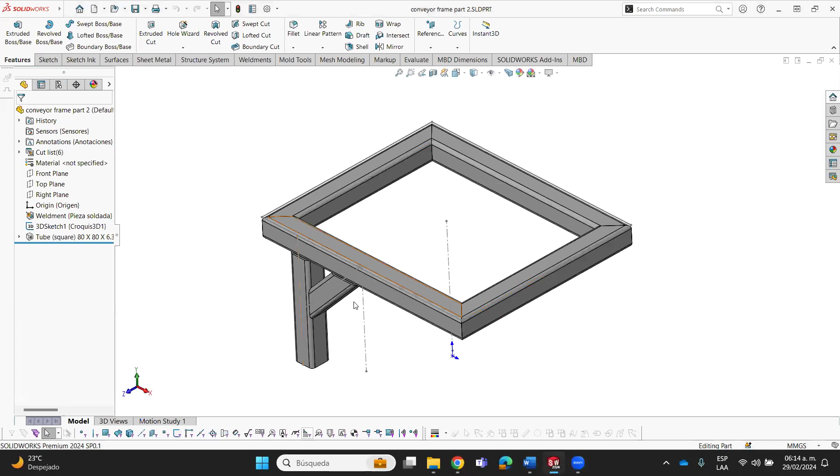This is the model we used in the previous session to study what weldments are. If you remember, the key topics we studied in the last session were first, multibody. What is a multibody file? What is the difference between a multibody and an assembly? A multibody is a collection of bodies that are inside a single file, a single part file.

So in a single part file, we can have these several bodies, as you can see here. This is not an assembly, this is a multi-body part. And we can have assemblies with multi-body parts, so we can have this mixed assembly.

The other thing we studied is the fact that in a multi-body part, we can have three types of bodies. Do you remember these types? Can be standard bodies. Those are bodies that you model using the standard commands: extruded, revolved, swept, loft. Okay, those are standard bodies.

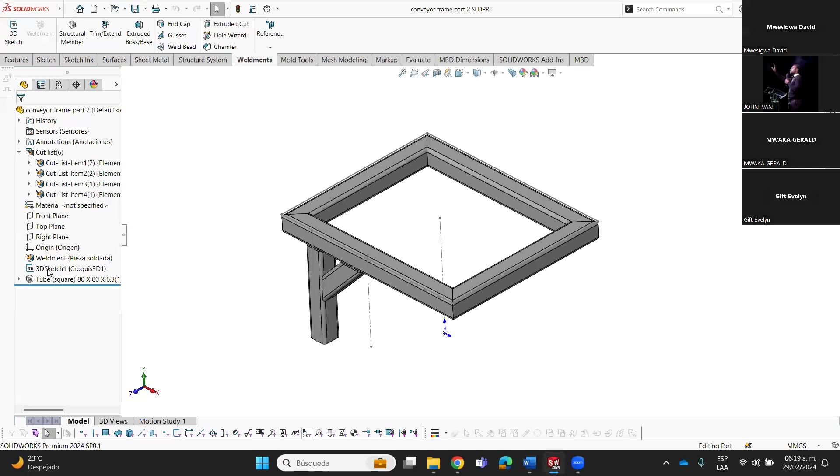Okay, and that is important to understand because, as you know, we need to define the design intent even before we start to model. And we define the design intent into these kind of structures through these sketches, okay, so that's the important thing.

To sum up, in a multi-body part we have these three types of bodies, okay? And we studied also the way we can insert these structural members. We have here this command that is called structural member command.

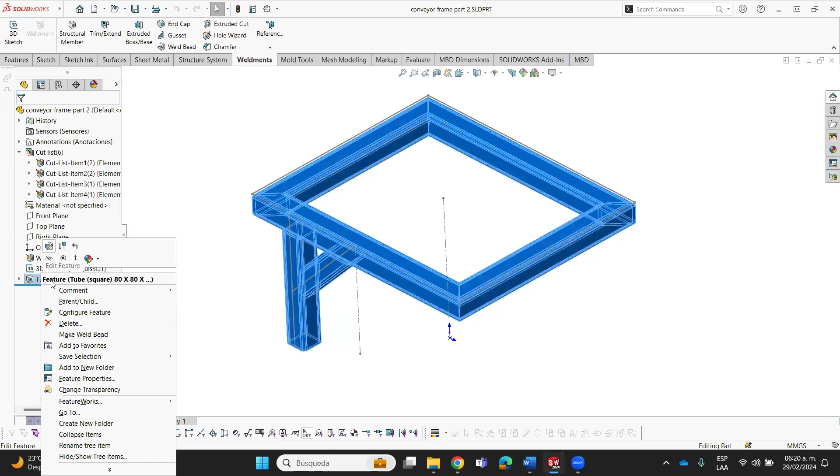And in this command, first we select the profile we are going to use, and then for each of these groups you have here, we need to select the lines that are going to be used as guidelines for the structural members. Why do we have groups here?

If you remember, the system, SolidWorks, allows you to put in the same group just the elements that are, number one, parallel, like this and like this. Or the other rule is you can put elements in the same group that are connecting by an endpoint, as you can see here, okay?

And just let me show you a special key point of this. Look at this group number 3. It seems that there is a connecting point here, and you can ask why this element is not in the same group as this one if we have a connecting point.

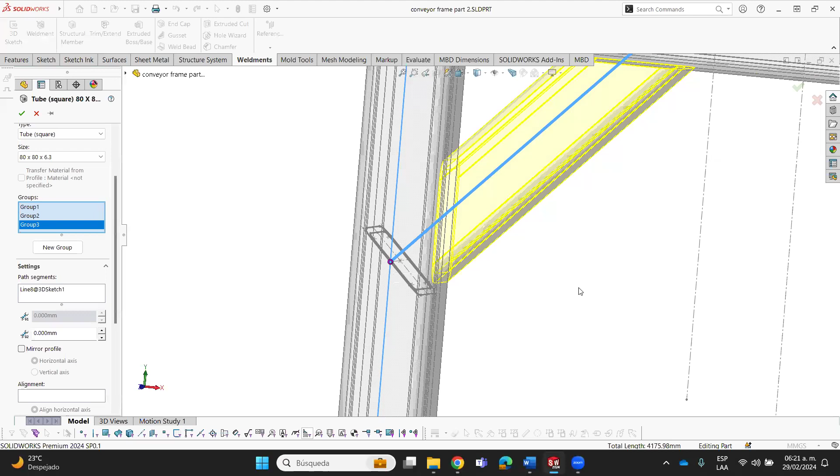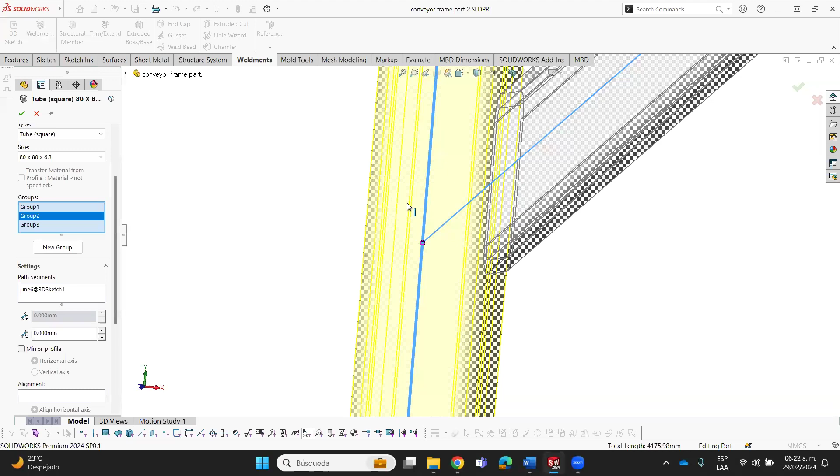And just to clarify, this is not a connecting point because this point is not splitting this line into two elements. If this point was splitting this element into two lines, this could be defined as a connecting point, but in this case, it's not. That's why we need to put this element in one group and this element in one group, because neither follow one of those rules I said. Okay, these lines are not parallel and don't have a connecting point in common.

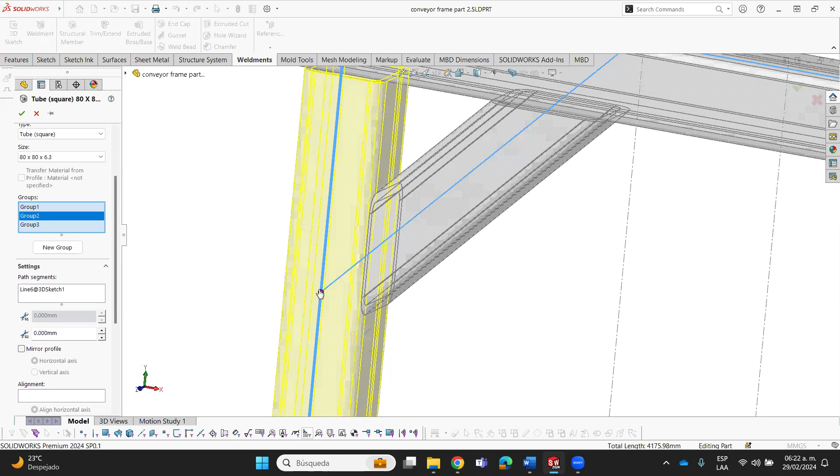In this session, we are going to study joints, how to manage the joints. And the other thing we are going to study is how can I manage a cut list. A cut list is a special way to manage all the bodies that I have in the multi-body part. And the other thing we are going to study are drawings. How can I make drawings of these structures, and how can I make views of just one single body?

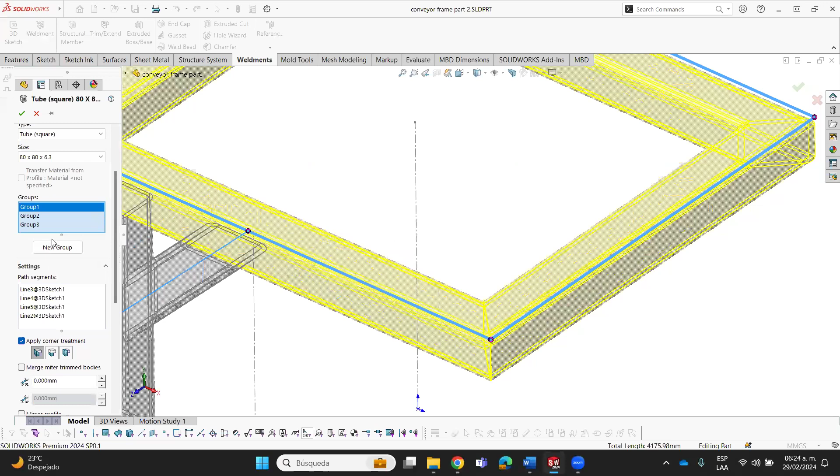Okay, so let's start. First of all, joints. We can see here the joints, and I need to change the way these elements are cut into this upper frame. So as you can see here, we have a special corner treatment here that is called end miter. We have here in the structural member properties the corner treatments we can use for each group.

So if you change here the corner treatment in the property manager, look at this, all the joints of this group are going to be changed. So these buttons are used to change the corner treatment of all the bodies in this group.

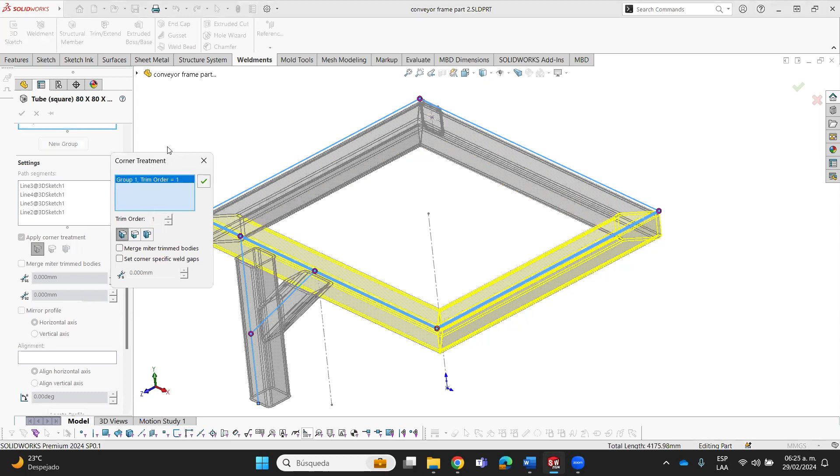But what happens if I need to change just one of the joints? Well, you can access the corner treatment properties of just one single joint with these pink dots. If you click these pink dots, we can access the corner treatment properties just for this joint, and we can change the order of the trim. I mean, we can change the corner treatment we are going to use in this single joint. All the other joints remain the same, and just this joint changes.

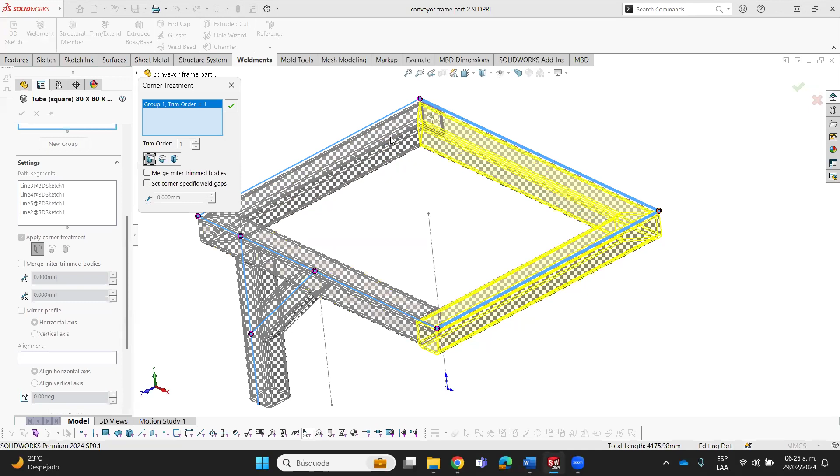Okay, I'm going to do the same with this in order that these two horizontal elements are not going to be cut. These vertical elements, yes, are going to be cut. So I need to change the joints. Let me do it here, and let me do it here again. So if you need to change just one single joint, use the pink dots.

If you need to change all the joints at the same time with the same characteristics for each group, use these buttons here in the property manager.

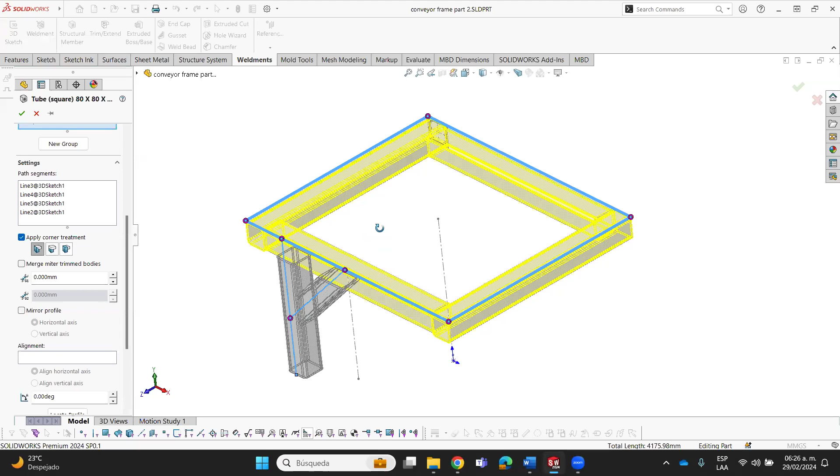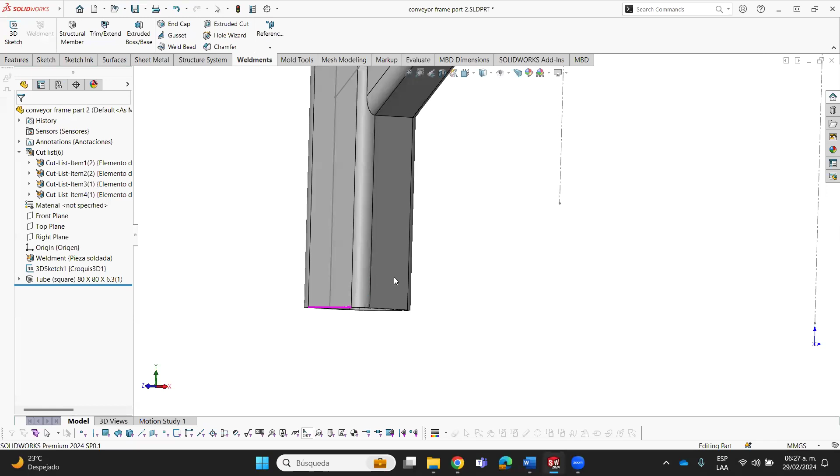That's all. And then I'm going to model a part, a body here, for the base of this structure. I'm going to use this face here. These bases are going to be modeled as a standard body. I mean, I'm going to use a boss. Well, let me make the sketch here, and let me put the dimensions and the relations.

Okay, let me put another here, and let me put a relation here. That's all. And I'm going to use the extruded boss command here. Okay, and that needs to be 20.

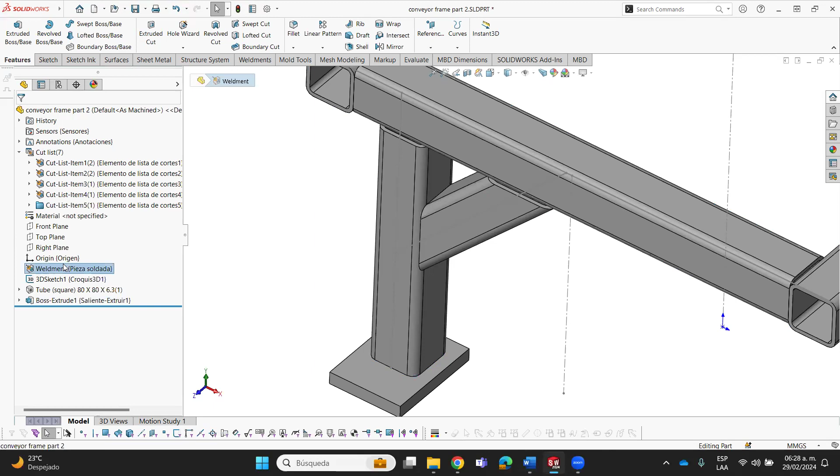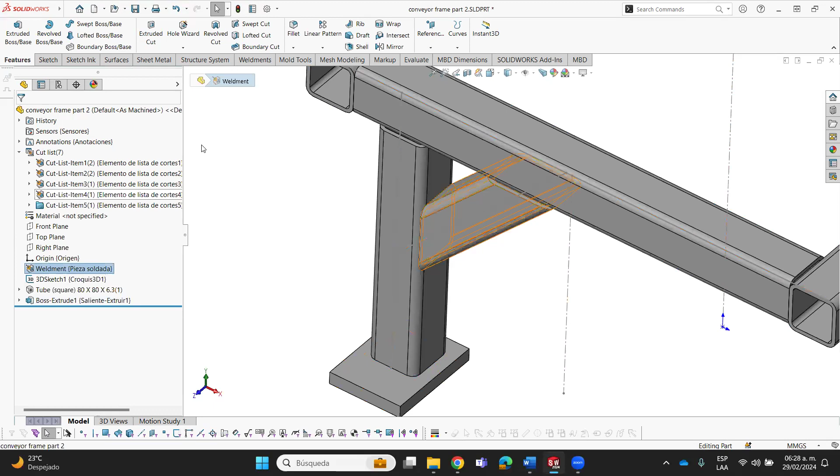Okay, and see there, each time we insert a structural member command, the system automatically puts a weldment command at the beginning of the feature tree, as you can see here. And this automatic feature also creates a cut list here. So this cut list helps me manage all the bodies inside the multi-body part, how these bodies are grouped according to the geometry and according to the material.

So all the bodies that have the same geometry and the same material are going to be put into the same group. As you can see here, look at this. I select this, put this element here, and all the bodies inside the group have the same geometry, I mean the same length, the same middle profile, and the same material. And that's the case of all the other elements.

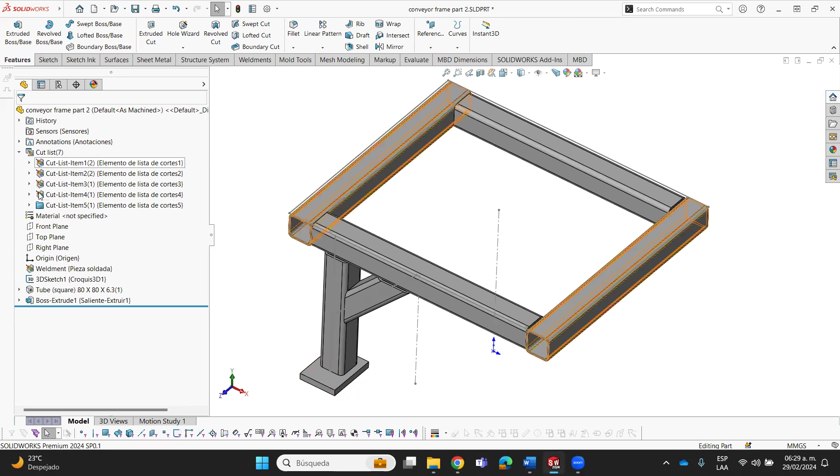And if you look at the icon of each group, you can see what kind of body is inside the group. Look at these icons here. These icons tell me that these elements are structural elements. This icon, the blue folder here, tells me that this is a standard element. And there is another icon for the sheet metal elements. So if you look at the icons, you can determine what kind of bodies are inside of the group.

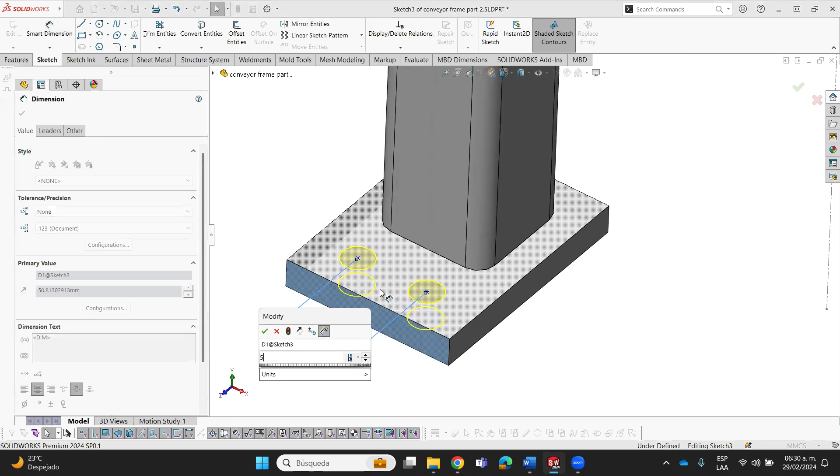Okay. Okay, let me put some holes here. Need to put some holes here. The position of the holes. Maybe you use this command more than one time. This is a really common command. So let me complete the sketch.

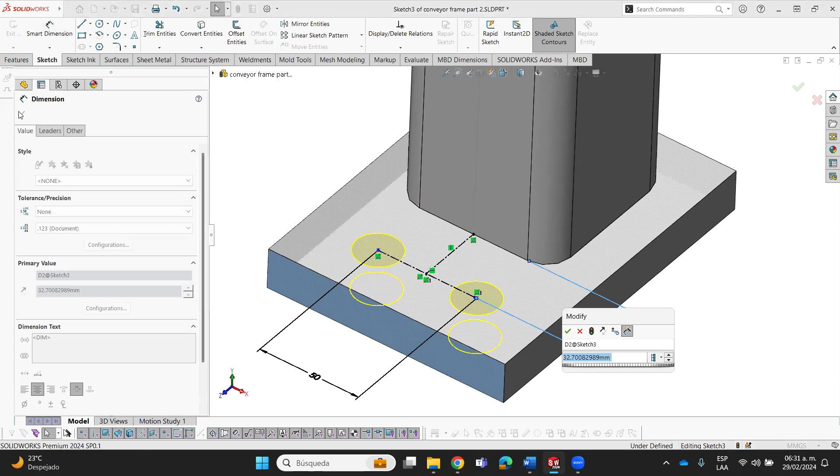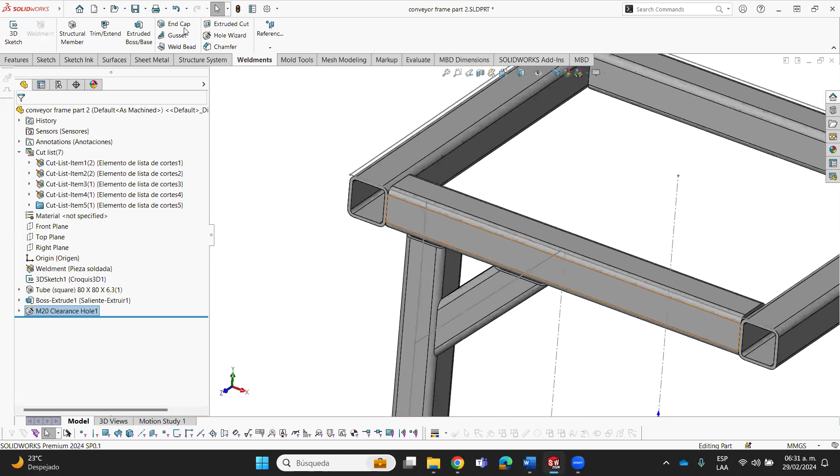In order to position these holes, we have special commands here in the Weldments tab on the command manager that I'm going to show you now. The first is the end cap command.

This end cap command helps me put some caps on the end of the open structural members. This end is open, so in real life, I might need to put a cap in this to protect the inside of the structural member. That's why I have this command here. So first you need to select the face where the cap is going to be based.

And then we need to tell the system what is the thickness direction we are going to use. We have three different directions for the thickness, as you can see here. This is the correct one for this case study. And then we need to put the thickness of the cap.

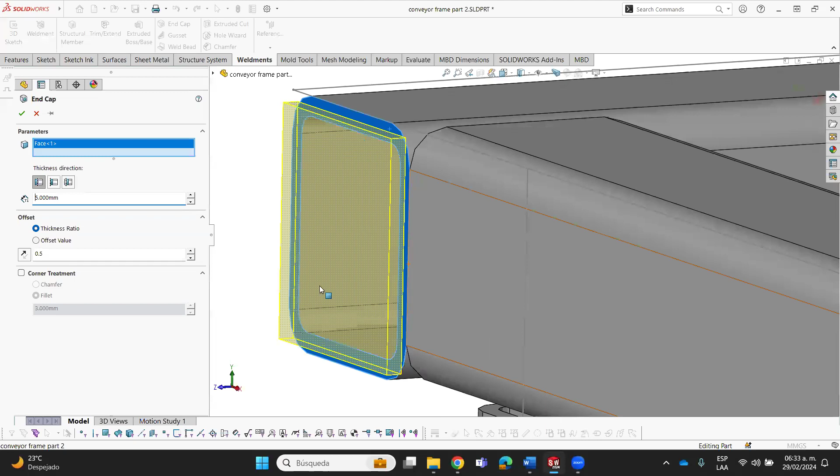And the other parameter we need to define is where the edge of the cap is going to be placed. In this case, we have two parameters to define the edge position. I'm going to use the thickness ratio. The thickness ratio is the percentage that represents the position of the edge along the thickness of the structural member. This value here, 0.5, says that the edge of this cap is going to be placed in the middle of the thickness.

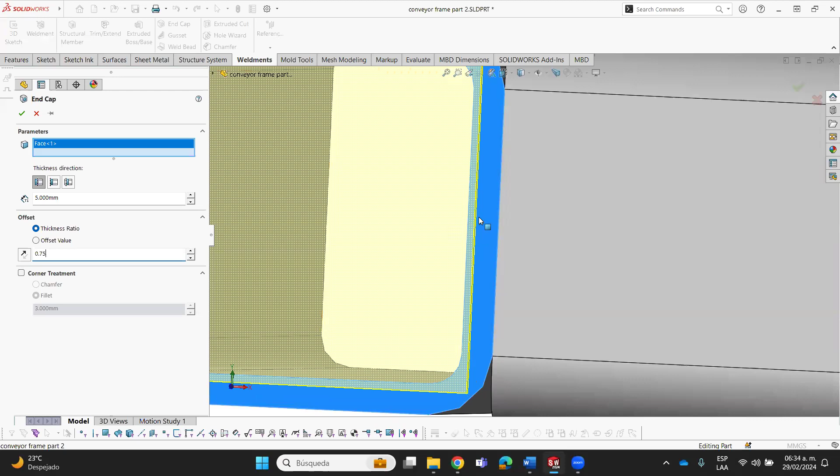If I change here, for example, to 0.75, look at this. The edge of this cap was placed at 75% of the thickness of the element, taking as a reference the external face of the element. So let me change back the value.

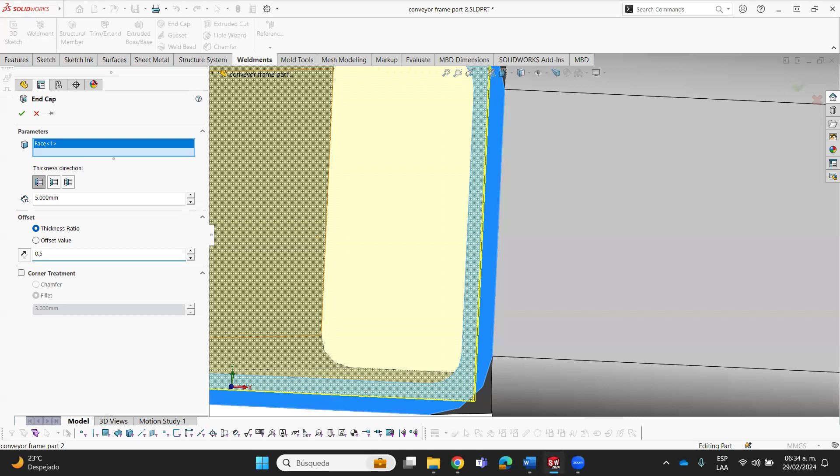Also we can define a corner treatment for this cap. We can use a chamfer or we can use a fillet. Let me select the chamfer, and that's all. So this end cap is defined automatically as a standard body. As you can see here, the cap is a standard body too.

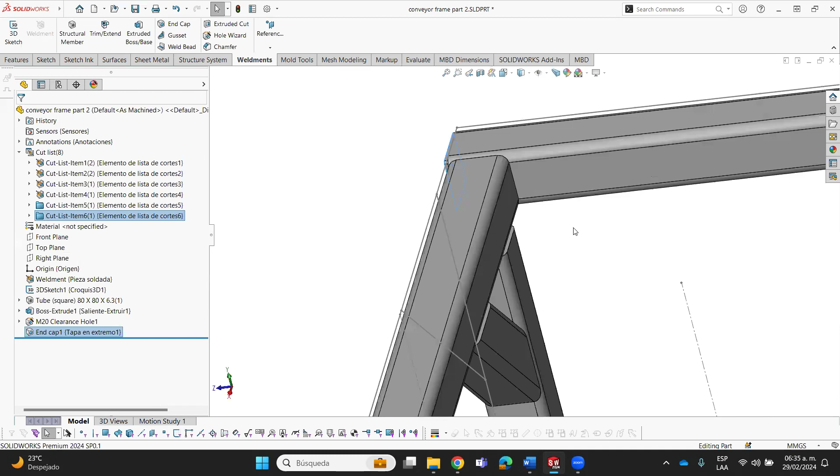The other kind of special elements in a structural member are the gussets. The gussets are defined by supporting faces. These gussets are used to put some strength into the structure. Those gussets are that kind of element that stiffens the structure.

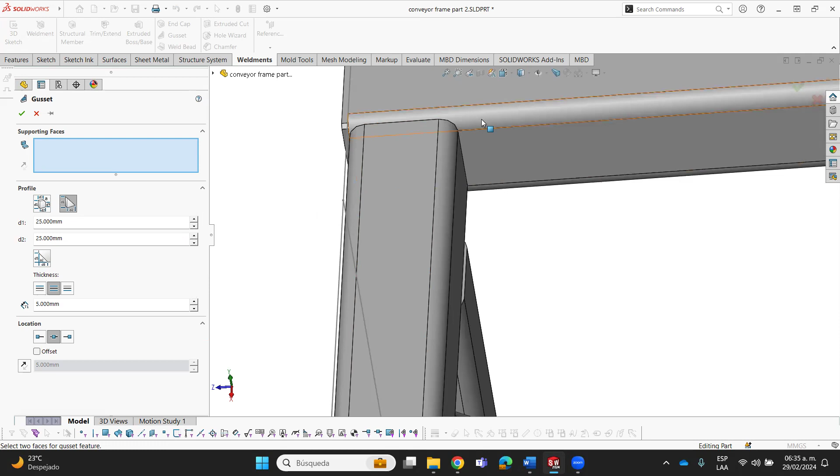We need to define the supporting faces between the elements, I mean where the gusset is going to be defined, as you can see here. And then we need to define the profile. If you look at the picture of the profile you selected, you can realize what this dimension represents. Let me put here 150, 150.

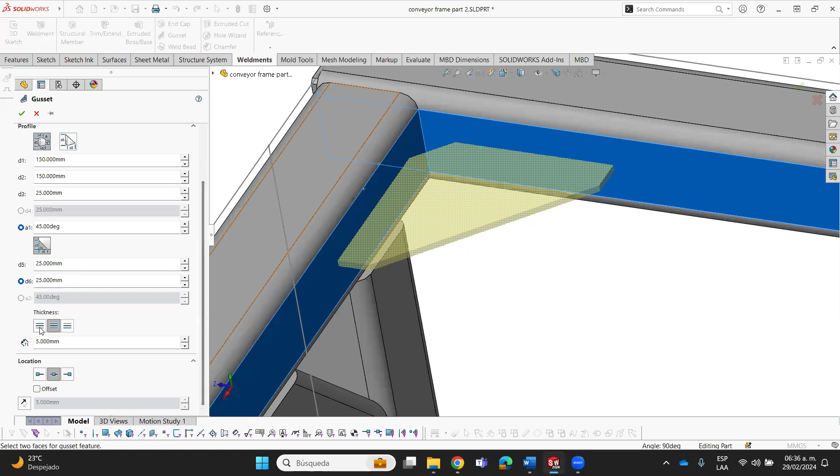Let me put here 25. And we can use also a corner treatment for this corner. I'm going to activate it, and I need to also define the dimensions, the thickness here. These buttons represent the position of the thickness according to this location point. This location point represents the point of the edge that intersects the two supporting faces.

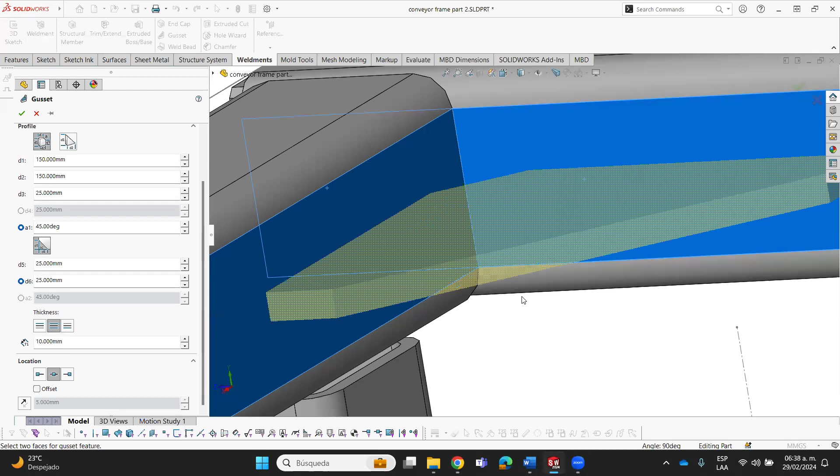I mean, the intersection edge for these two supporting faces is this. And we have here three location points: two on the sides and one in the middle. According to the point we selected here, we can put the thickness through one side, through the other side, or through the middle. And that's just to clarify the position of the gusset.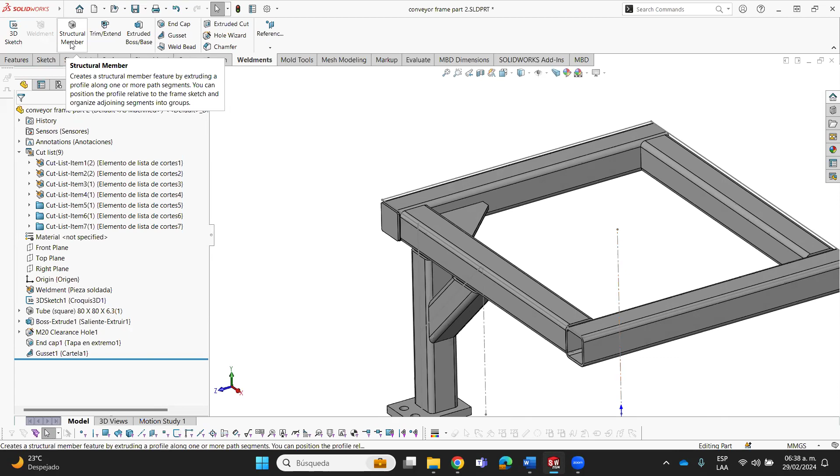And as we saw with the end cap, this gusset is going to be defined as a standard body too. So the only way to define a structural member body is using this structural member command. Otherwise, the bodies are going to be defined as a standard body or as a sheet metal body.

That's important to know. And just to complete this structure, I'm going to use a mirror command here. One improvement that was included into SolidWorks—I remember it was in SolidWorks 2019, no, 2021, I'm not sure, but it was between 2021 and 2022—is that you can define a mirror through a primary plane, but also through a secondary plane, so you can mirror in two directions.

Before that SolidWorks version, you couldn't do it. You weren't able to do it. But now it's easy to mirror in two directions. I'm going to select the primary plane and then the secondary plane.

That's why it is important that you define the design intent, because in the design intent of this structure, I defined that all the elements need to be placed in the middle of these planes. Okay, and let me select the bodies.

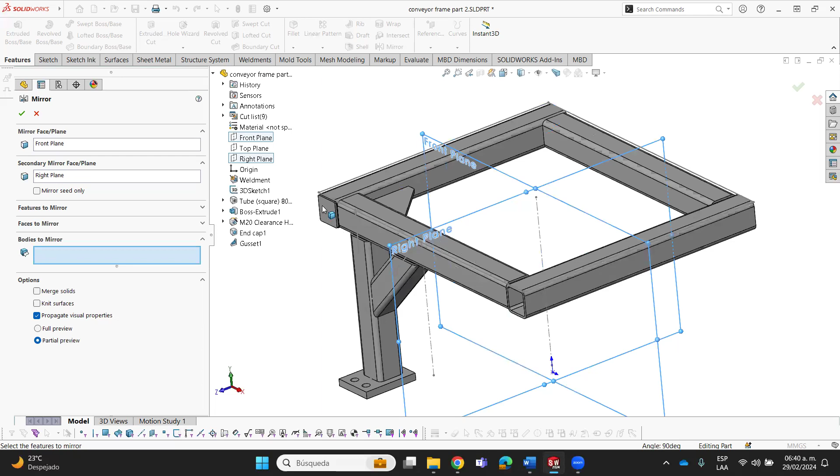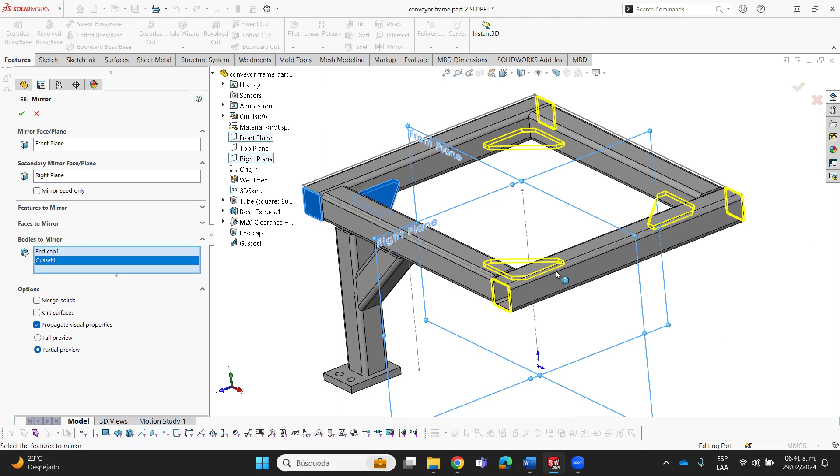In this case, we can mirror features, faces, or bodies. I'm going to mirror bodies, that's why I selected this section here. And I'm going to select the bodies. Look at this—each time I select a body, the system shows me a preview of the bodies and the position where those are going to be placed.

And the system recognizes these copied bodies, and the system also puts those bodies into the group that they need to be in, according to the geometry and the material.

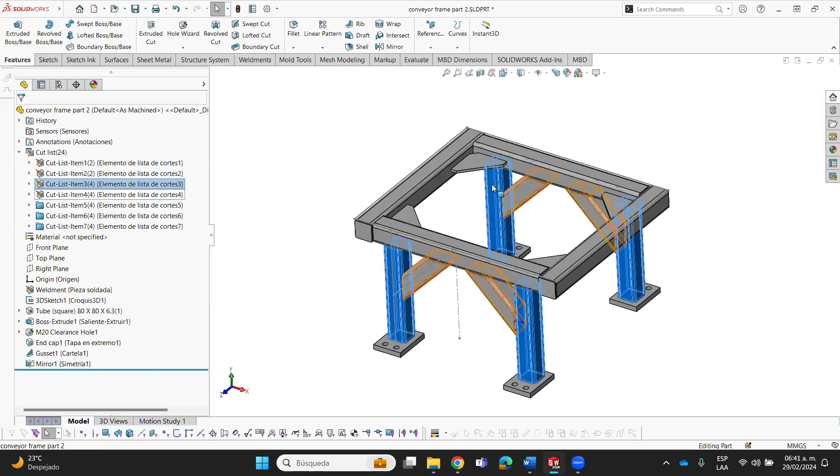Okay, we completed our structure here. And what happened with the cut list? As I told you, the cut list helps me manage all the bodies according to the geometry and the material, but it also helps me manage the properties for each group of bodies.

If you right click on one of the groups that we have in the cut list, and then select this properties line, the system is going to show me the properties that are defined for each group of bodies. Let me put this here to show you.

In this left section of the cut list interface, we can select each of the groups we have into the multi-body part. There is also a dynamic highlight for each of the bodies that conform the group. Then in the right section of this window, we have the properties that are included for each of the groups.

There are some properties that are automatically defined as long as I model the multi-body part. Those properties are defined automatically by the system, and those properties are the most common we, as designers or product engineers, need on the drawings.

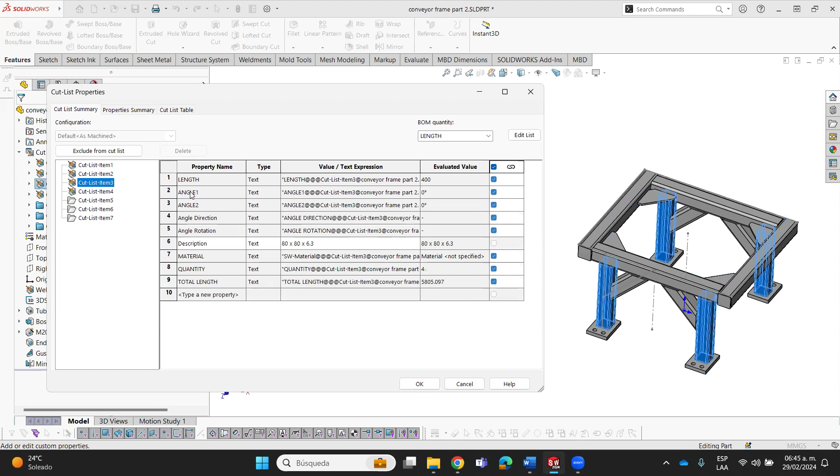And we have these properties in all the structural member bodies on the multi-body part. What happens with the standard bodies? The standard bodies are automatically defined with another kind of properties. These standard bodies don't have a length and an angle, so those properties are not included in this kind of body.

But we can put other properties here, for example, weight. Peso means weight in Spanish. And we can link this property to a physical property, to a mass property here. So we can do the same with all these standard bodies, as I am doing here.

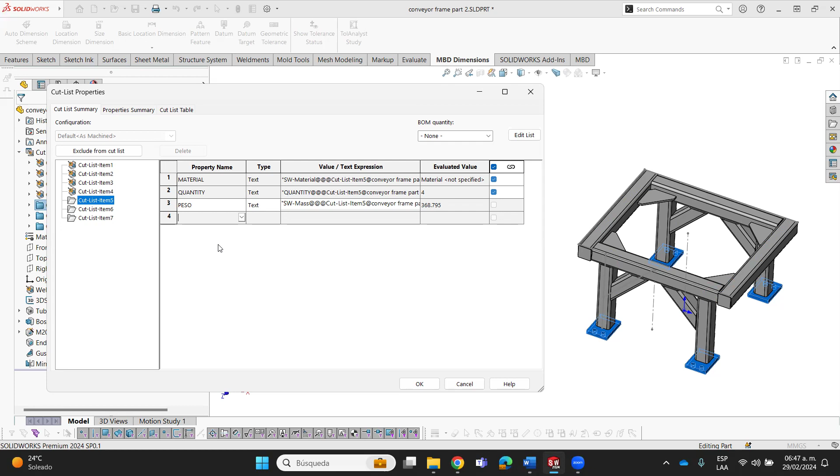So we are not limited just to the properties that the system defines automatically. We can put whatever we need on the groups through the cut list. That's why it is important to understand how to manage the cut list. Okay, that's the cut list.

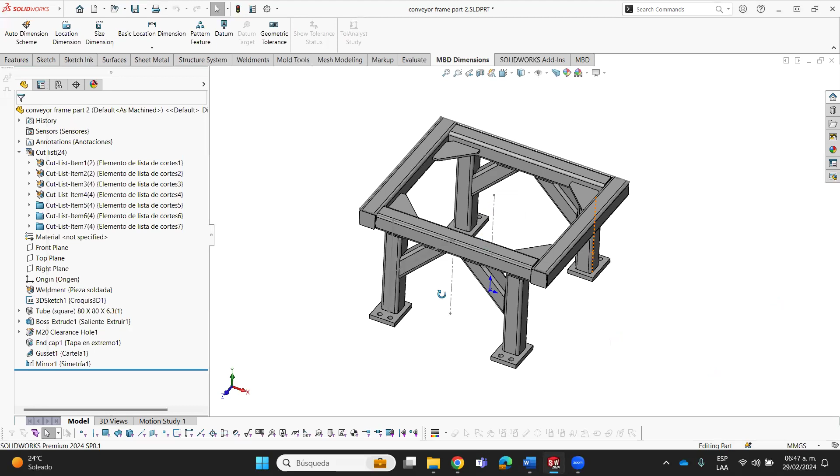And what happened with the drawings? What are the capabilities we have on the drawings for these multi-body parts? Let me start a drawing here and select a format, wherever you want. Let me select this format, the ISO, wherever you want—it's not important for this session. You have your own standards in your company.

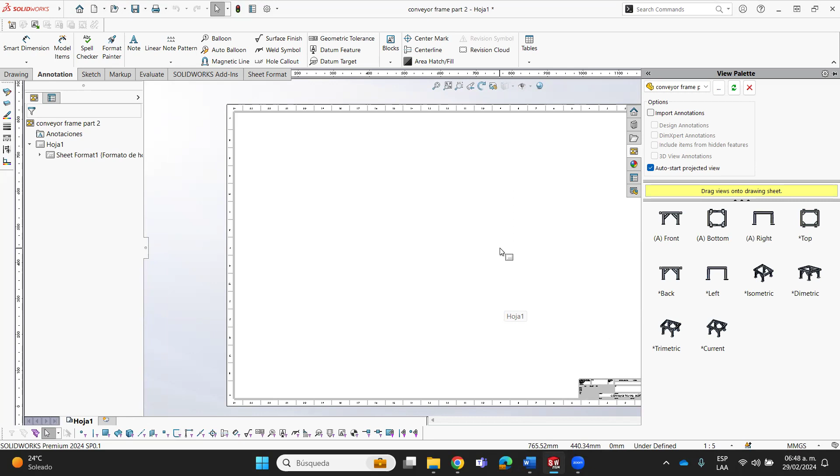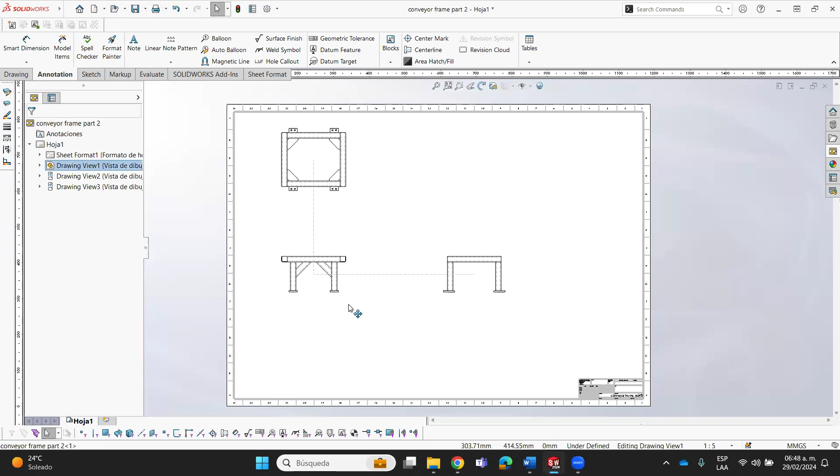And also, as with any other kind of part, we can put different kinds of views—standard, projected, section, detail view. We can do it with a multi-body part just as we can do it with parts that only have one body. I'm going to put here a front view and then some projected views. Let me hide the sketches here and place this view.

Okay, what happens with the dimensions? The dimensions can be inserted in the same way you do it with other kinds of parts. We put the model items. I want to erase, I want to delete some of these dimensions.

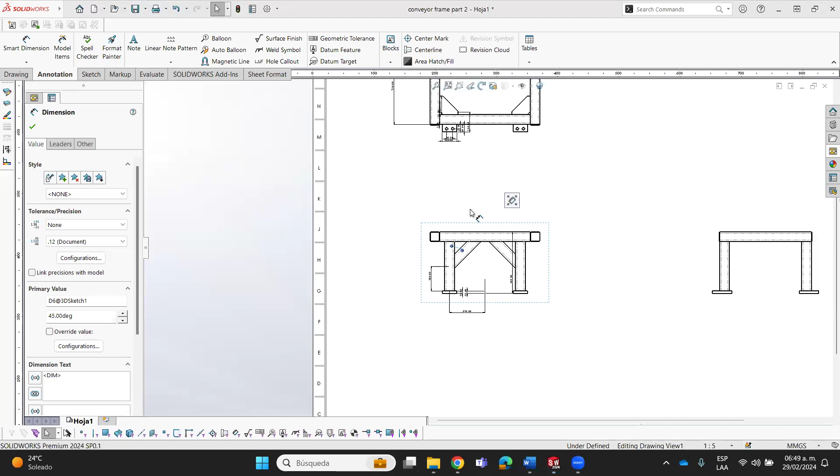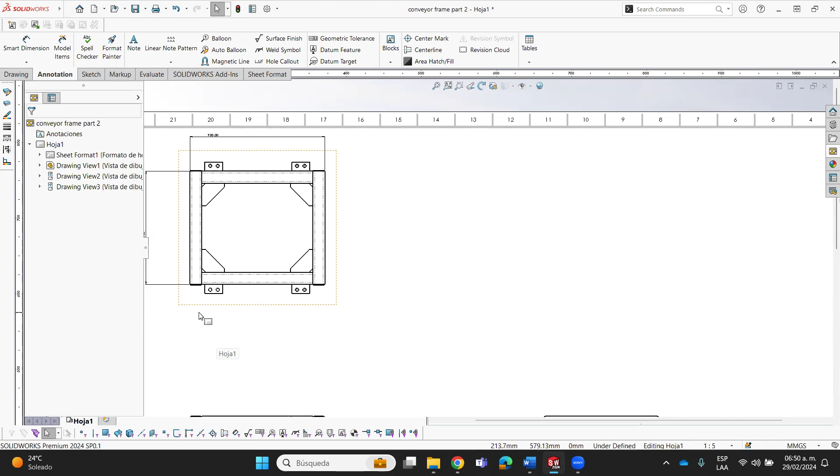Okay, let me erase these dimensions too. I erased or deleted these dimensions because I want to define them in a single body view to clarify for the production team. Okay, and how can I...

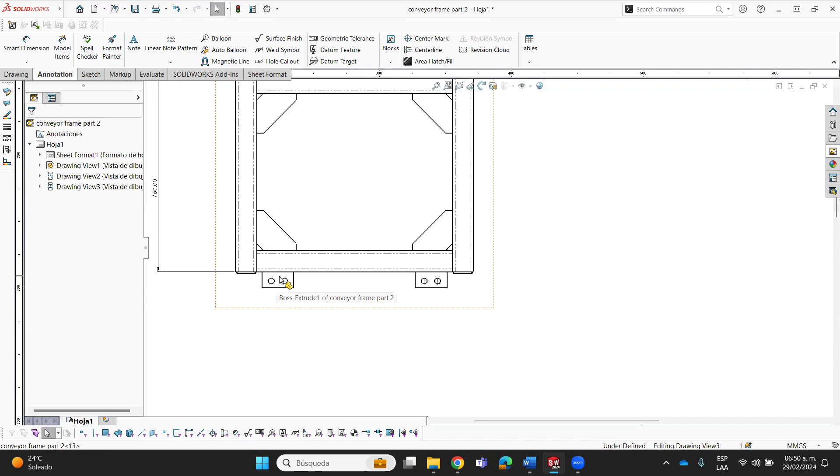Make a single body view through this part? For example, I want to make a view for these base elements I modeled on the structure. How can I do it?

Well, first I need to put a view that represents the same position or the same projection that I want to use to represent the single body. That's why I'm going to select the top view. Let me put the top view here.

And then if you select again the view, you put them there. And if you go to the properties of that view, you are going to find this button here. This button is special to convert the view to a single body view.

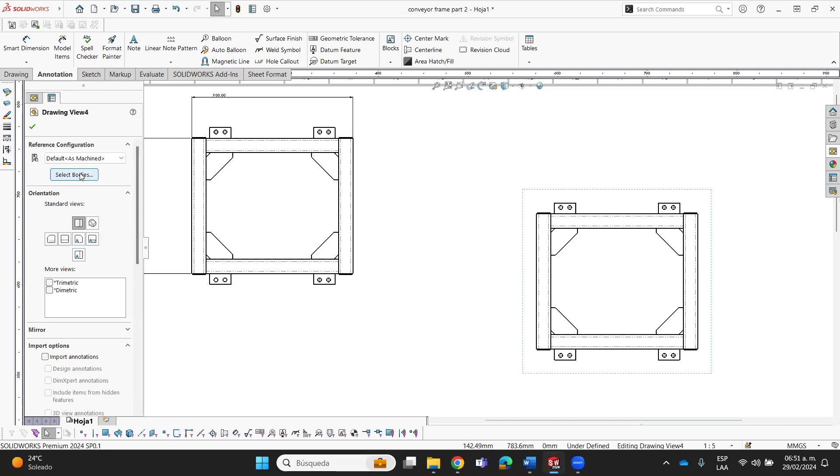That's why I'm going to click this button here, and the system automatically shows me the complete multi-body part just to select the body that I want to retain on the view, okay? And this is the result here.

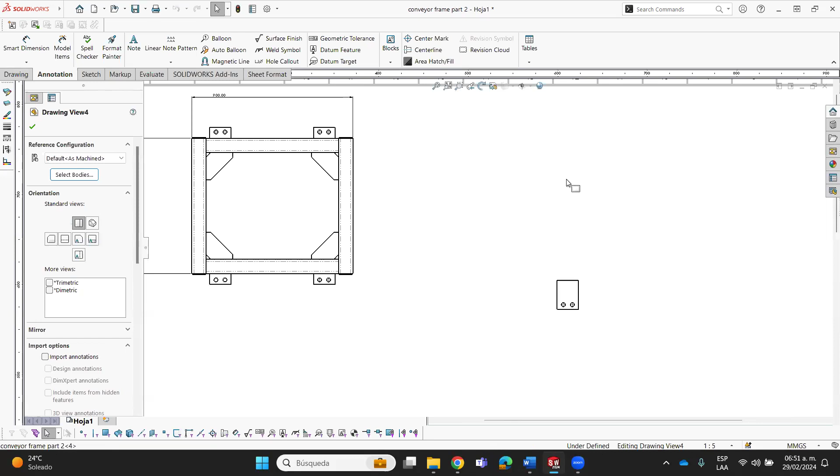So each time you want to make a view for a single body on the drawing, you need to use this button here, okay? The select bodies button.

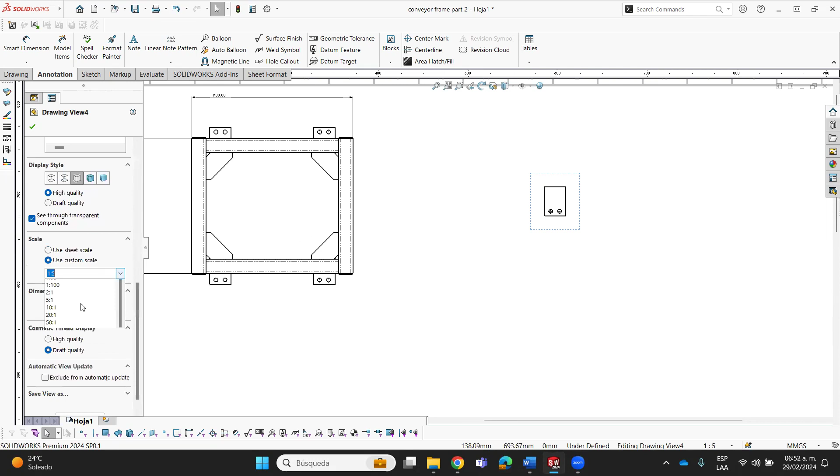And I'm going to change the scale. Let me put this. And then, as you do it with a common view, you can import the model items. Okay, let me select this.

If you need to put another kind of annotation, I mean a hole callout, you can do it, a chamfer callout, whatever you want. You can do it as you do with other kinds of views.

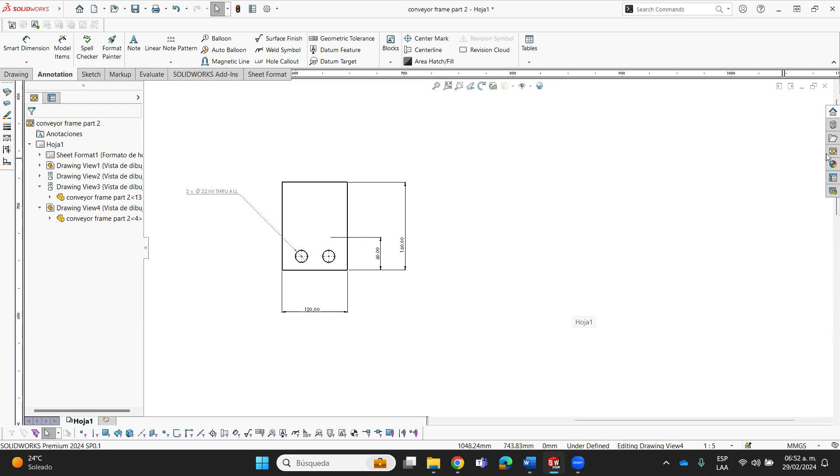Okay, let me do the same for the gusset. I'm going to do the same for the gussets. And again, after placing the whole view, I'm going to select again the view just to click this button here.

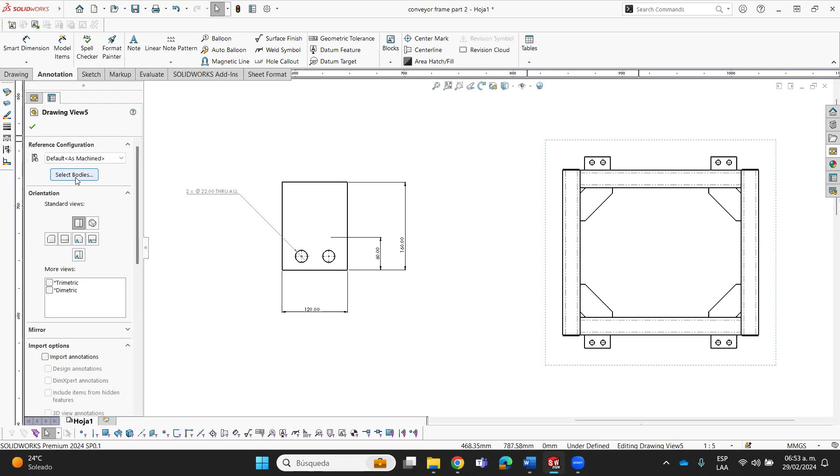And I'm going to select one of the gussets. Okay, and again, if I want, I'm able to change the scale. Okay, I'm able to put the dimensions, and whatever you want.

What about sections, detail, and other kinds of views I can insert for the whole views of the model? I can do it with a single body view. For example...

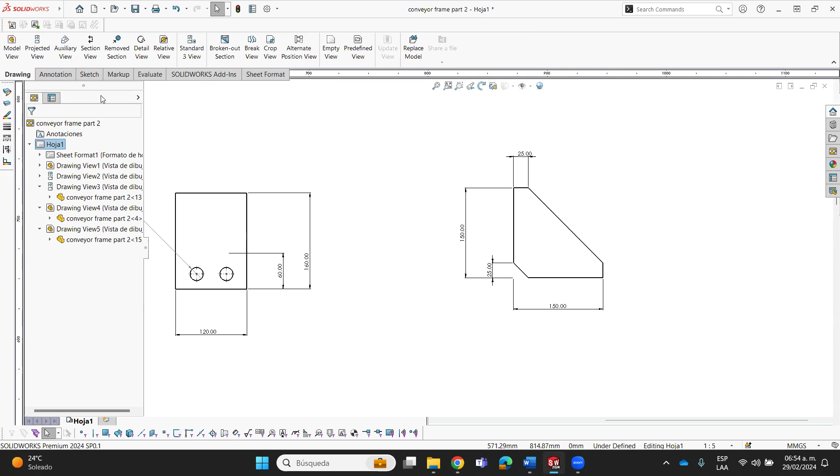This is a really easy example. I'm going to put a section view here and look at the result. The result is that I have a section view for that single body.

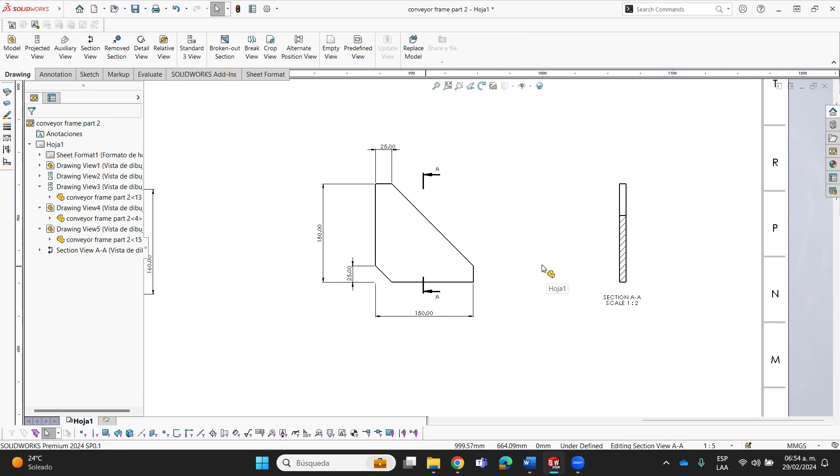And that's the result for all the other kinds of views: detail view, broken-out section view, and whatever you want. So the behavior of a single body view is the same as the behavior for a full model view. Okay.

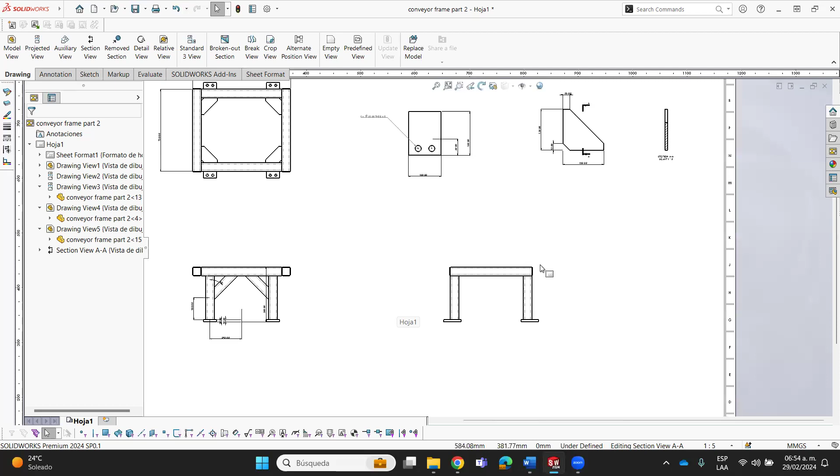Okay, let's go to the next section. And the next section is what happens with a cut list in the drawing. So the way to represent a cut list in a drawing is through a table. In that table, we can include all the properties we define automatically or manually in the 3D model.

So where can I find the cut list table on the drawing? Well, you need to go to the command manager, on the drawing command manager. You need to go to this table command, and under this table command, we can have the cut list, weldment cut list table.

Okay, and the first thing we need to define to insert that table is the view that is going to be linked to that table. In this case it's the front view. Okay, and I can place it here.

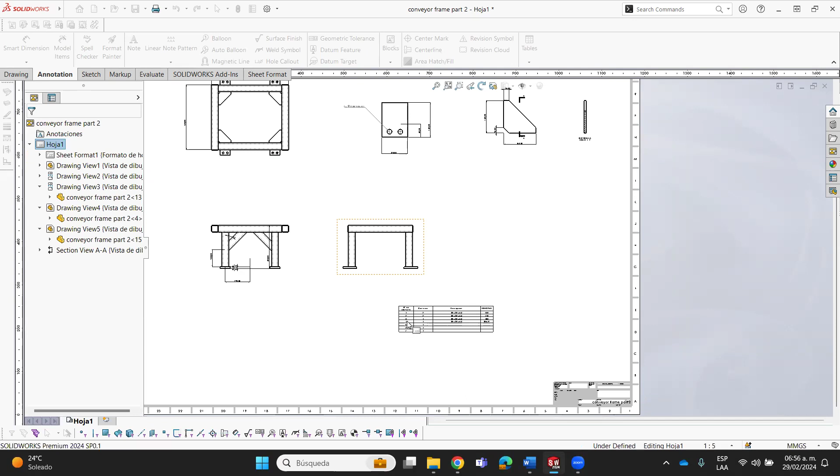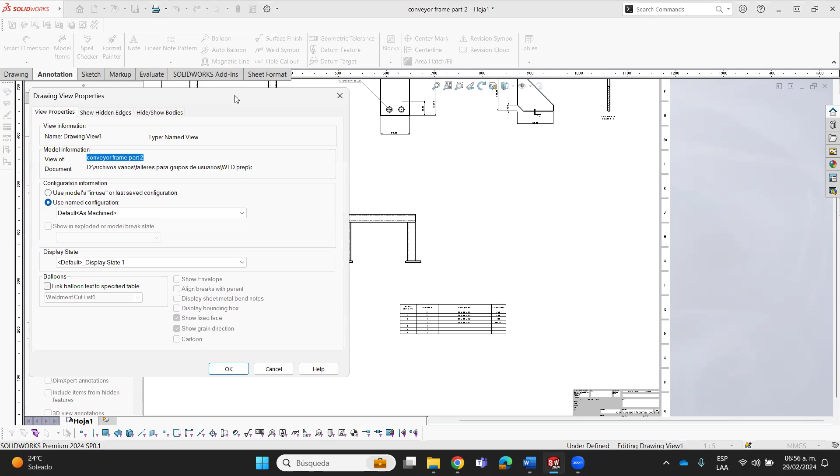It is important that you verify that the table is linked to the view. And the way to do that is to right-click the view that you select when you insert the table, and then go to the properties of that view. Inside the properties you have this section here, the balloon section.

If you check this button here, you can select the table that is linked to that view. And that's important because in a production drawing, an assembly drawing, or whatever kind of drawing, we might have more than one table. If you don't clarify, if you don't make sure which of these tables is linked to the view, the system automatically defines which table is linked to the view.

And sometimes that results in issues, because if you let the system define it automatically, maybe that's not going to be the right table for the view, okay? That's why you need to come here to select the table you have, okay?

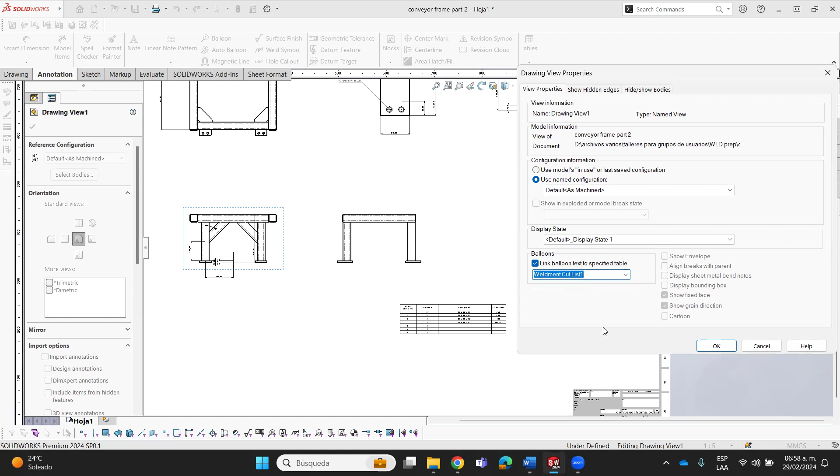Great, and with this table I can change the font. Let me put a bigger font here. Oh, that was too much.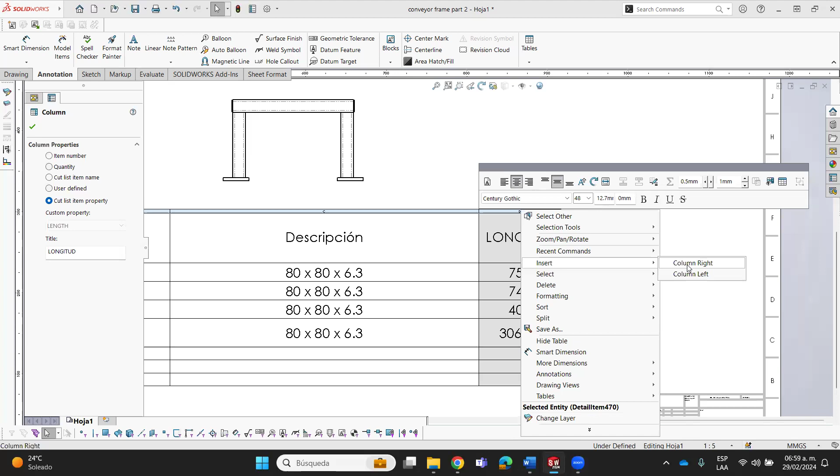Then if I select this empty column, in the properties side, we can select which kind of property I want to show here in the empty column. So if you want to show one of the properties you define manually on the cut list, you need to use this option here, cut list item property. Then you can find, for example, the weight. Remember, peso means weight in Spanish. And I can select this property that I define manually.

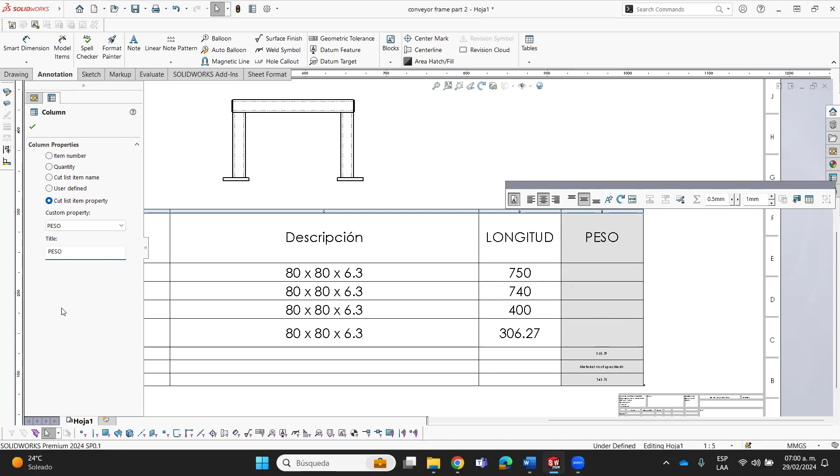And those are the values we have for each of the standard elements. And look at this, it seems that we have an issue here. This is not the value we want to show for this group.

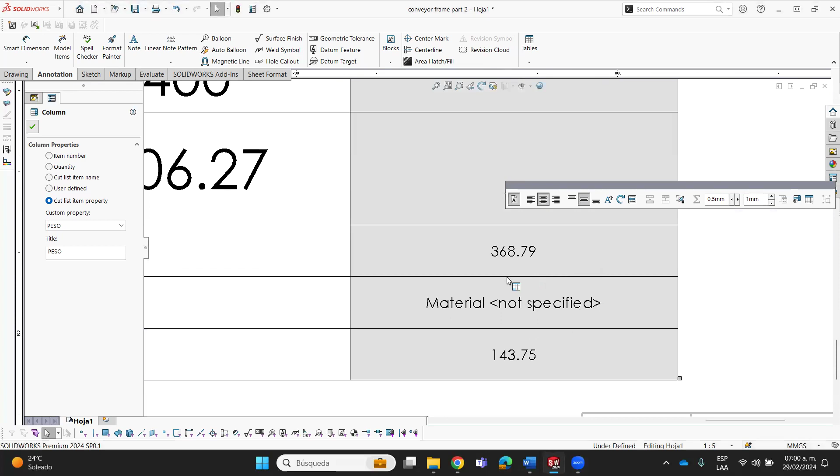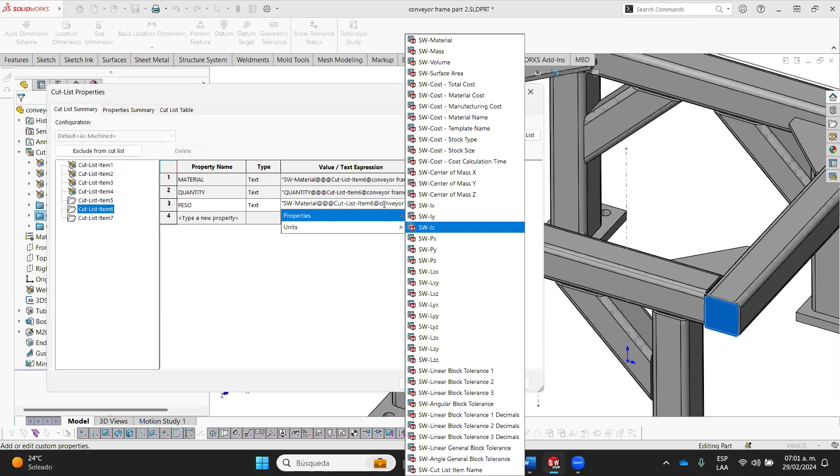To solve this, we just need to go to the model, go to the properties. Look at this, in this case I made a mistake. I selected not the right property for the weight, and I'm going to change it to the mass instead of the material. Let me clear this. Let me put the property. Okay, and that's the right property here.

Each change you make to the model or to the properties in the cut list is going to be synchronized with the drawing. So remember, each change that you make to the model or to the properties in the cut list is going to be spread to the drawing.

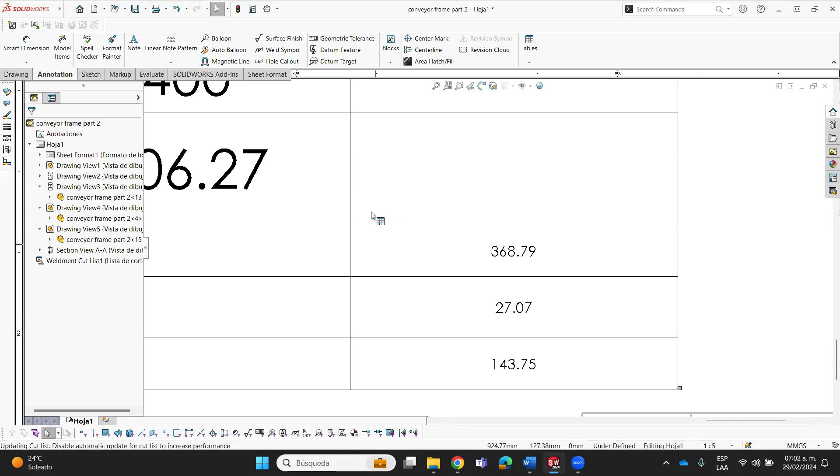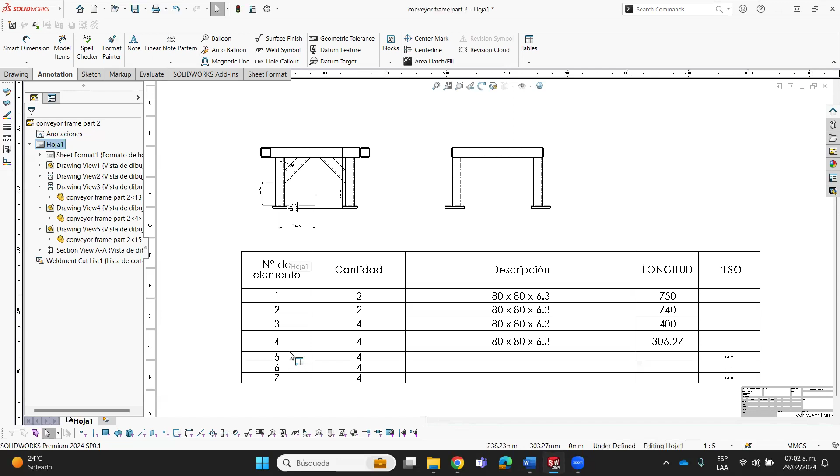The last thing I'm going to show you is how can I link the solids, the bodies, with the table. We can use balloons, and we can insert manually those balloons as you do in an assembly. And the number of those balloons are linked to the cut list.

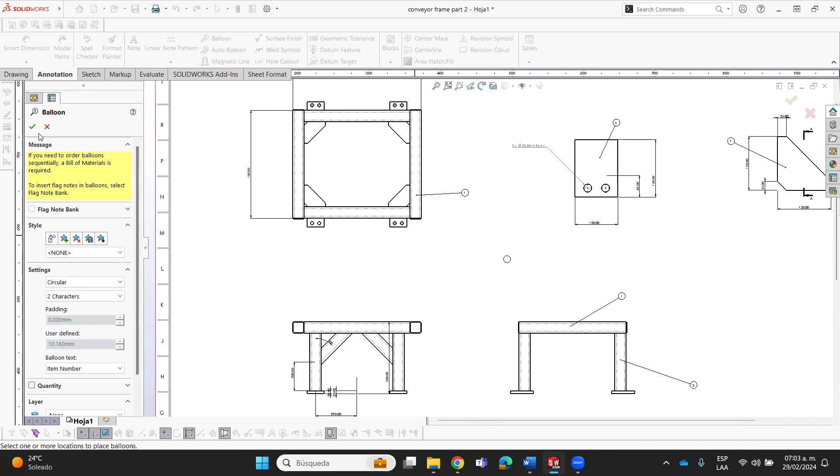So if you can see here, these numbers are linked to the table. That's why it is important that you define on the properties of each view what is the linked table you want to use, because this property defines the number of the balloon that is shown in each of the bodies. So this number here is linked with this number here.

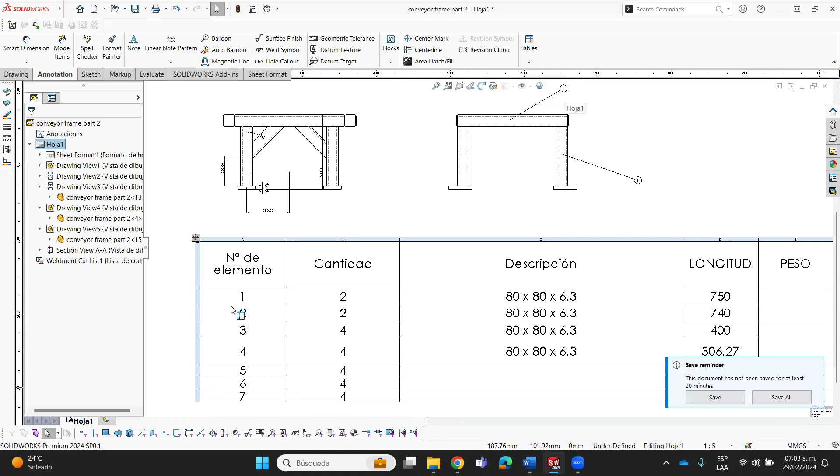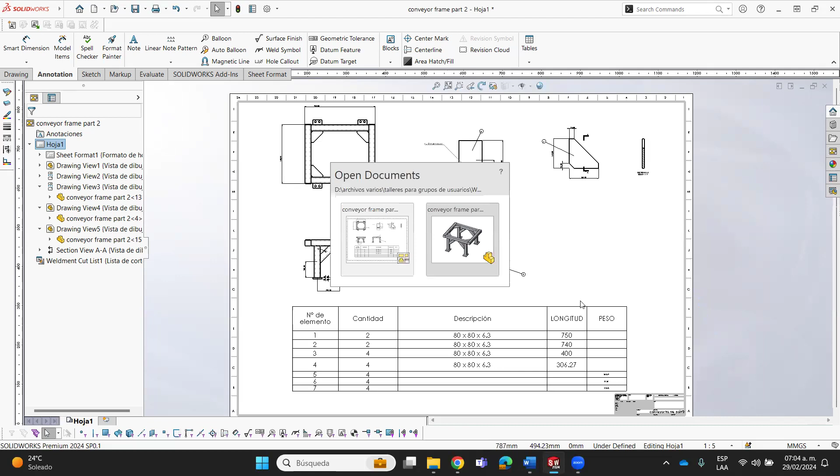Well, that's all. Just to sum up what we see on this session: we started to study how to manage the joints. Remember, we can manage the joints individually or by a complete group. Then we studied what is a cut list, what it represents, and how this cut list helps me to manage or to group all the bodies. We studied again what kind of bodies we can have in a multi-body part.

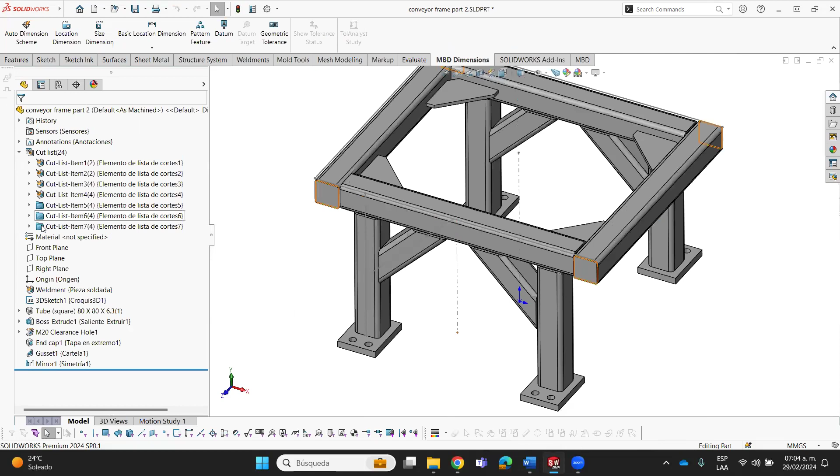And then we made a drawing of the complete structure, and also we made some views for a single body here. We inserted a cut list table to show the properties for the production team, and also inserted balloons to link the views with the table. And that's the basics you need to know about weldments.

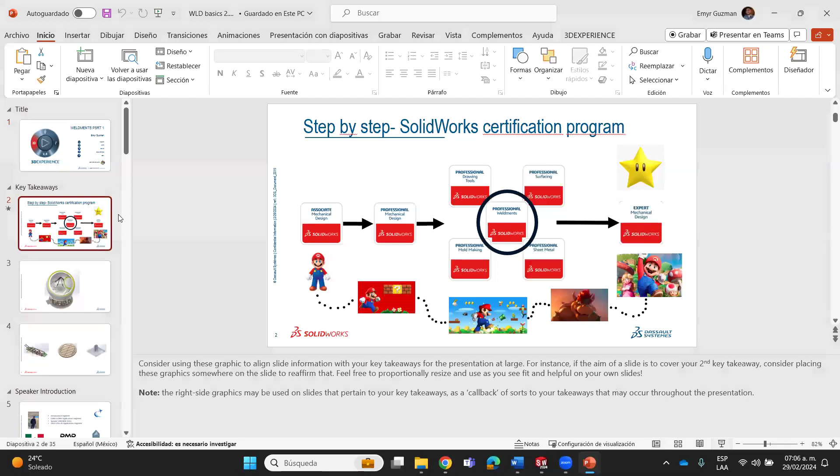There is a path you should follow between the CSWA. The CSWA is the first step in the certification program, which most of you achieve right now. Then between the CSWA and the expert, which is the top certification you can achieve on the CAD specialty, there is a path you need to follow. The next step for you is the CSWP. If you have the CSWA, the next step is the CSWP. Then you need to achieve at least 4 of these advanced certifications to have permission to present the expert certification. So you need the CSWP and 4 of these advanced certifications to present the expert certification.